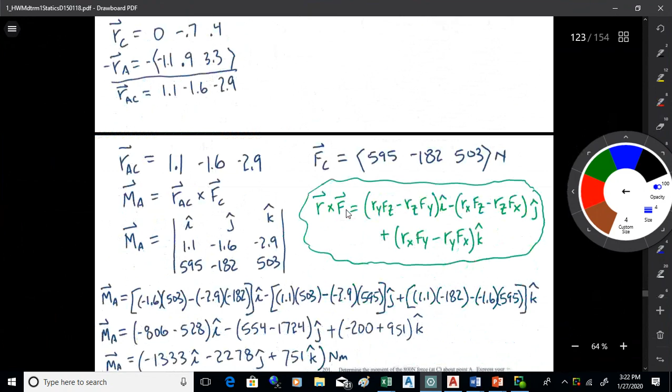All right, now we do have our first midterm coming up on Wednesday of next week. Okay, so we have that coming up. Let's have a look at a 3D review, because a lot of the stuff we're going to deal with on that midterm will be 3D, and we're kind of finished up a unit. We're not going to do too much more 3D.

So if you're online, it's 3D review problem from 2014 from the Moodle page downloads. Okay, it's available there. So let's have a look, and there it is. It's down in the homework downloads down there a ways. I think so. You should be able to find it there. Looks like this. So let's have a look. So find some other students that you can work with if you'd like.

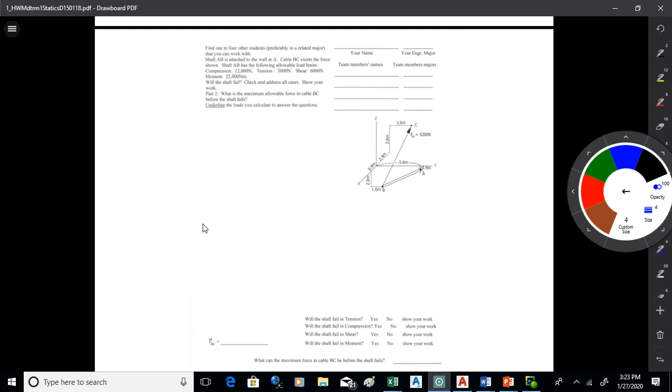We've got this shaft, and it's attached to the wall at A. And what we'd like to do would be to see if it's strong enough to take this force we're going to apply. So we're going to apply a force of 5,200 newtons to the shaft. Okay, now what we know about this shaft is it has allowable limits on it. It can handle 12,000 newtons of compression, 3,000 of tension, 6,000 of shear, and 22,000 newton meters of moment.

So that's like the specs on it, the specifications, what it can do. Now keep in mind that when a manufacturer makes something like this, they don't have any idea what you're going to do with it. So they will just give you the strengths that they think the object has, okay? So this is what it can withstand, but they have no idea what you're gonna do with it. So they just tell you everything it can do. And these are the common things that they would rate it for, okay? So tension, compression, shear, and we also have a moment criteria on this.

What I'd like to know is, is this shaft strong enough to handle that 5,200 newtons that's acting on it, okay? And what I would also like to know is what's the maximum allowable force in cable BC before the shaft fails? Okay, so how high of a force can you have in BC before the shaft fails?

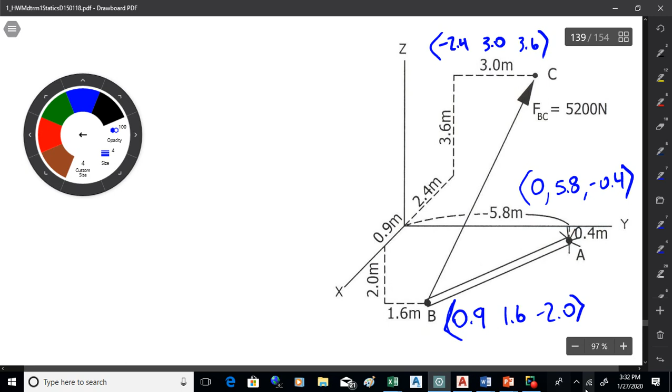Okay, there's the force vector. So now remember, you can have a little bit of difference from me. It isn't like my answer is perfect. If you're within 1% of my answer, you're good, right? So negative 2581, 1095, and 4380. That's what I got for that force vector. We good with that? In the ballpark, right? Any questions on that?

Okay. All right, the next thing to do, let's go ahead and find the axial force in that shaft. So see if you can find the axial force in the shaft. Remember, the axial force can be tension or compression. It's one or the other. I gave you both strength numbers because a manufacturer doesn't know what you're going to do with that shaft. They're going to tell you everything they know about it. So what you have listed on the top of that page is every possible thing to know about that shaft.

It's up to you to figure out whether you got tension or compression. Okay? And you'll have one or the other. You won't have both. It'll be one or the other that you will have. Okay? We good with that? So let's find the axial force in the shaft. It's either tension or compression.

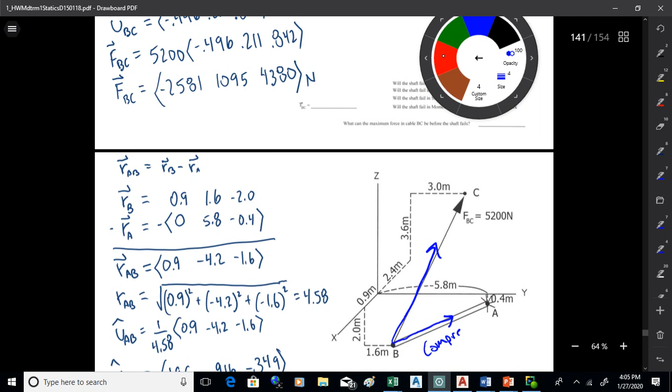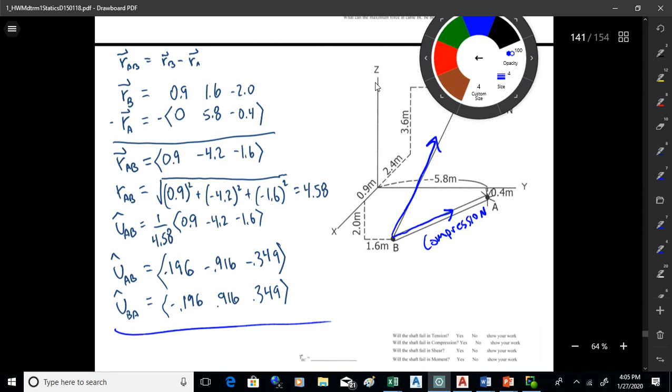So when I saw that, I said, okay, I will use the vector that goes from B to A. So I use this unit vector. Okay? Because I could see that component of the force goes from B towards A. And when I did that, sure enough, I got a positive answer. Now, had you used the unit vector that went from A to B, it would not have been a problem. You would have got a negative answer. And think of the negative as saying, no, it doesn't go from A to B, it goes from B to A. I just thought that's what it was supposed to do when it was compression.

Oh. So it's in like... Yeah, okay. There's different sign conventions. Negative is often used to signify compression, but in this case, the negative just means it doesn't go from A to B, it goes from B to A. So if I did this on the test, like if I left it as negative, would you mark... No, I don't get too excited about that, but I might have a little thing for you to circle. Is it tension or is it compression? Okay, yeah. And that's what I would pay attention to. The nuances of how you write the numbers down isn't a big deal. But whether it's tension or compression, that's a big deal. Okay.

Are you okay with that? In this problem, there isn't really tension. Right. See, a shaft is in one or the other. It's not going to be in both. It's either being compressed or in tension. It's one or the other. So you just have to analyze compression on this one.

Okay, and that's kind of what I was saying earlier, that the manufacturer will tell you what the shaft will do because they don't know what you're going to do with it. So they gave you all the specs on it. Okay? Is that good? Mm-hmm. Questions there? Okay.

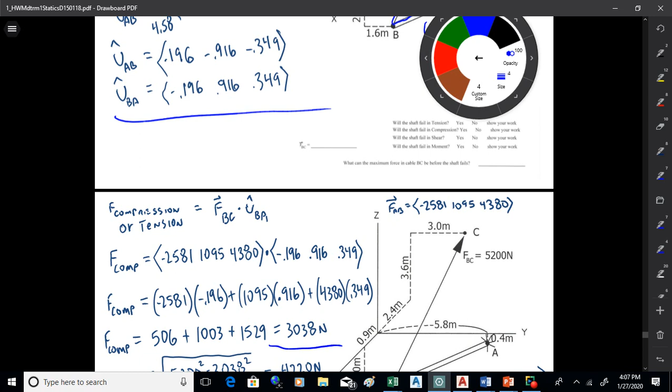Okay. The next thing there is to find the shear then, if you've gotten that far. If you've got questions, don't just kind of walk around, just ask me. But, all right, so the next thing is to figure out the shear. Let's pause the recording again here.

Okay, the moment would be next. Okay, so the moment is found using that cross right there. And you want to get your R vector and cross it with your F. And then once you've got that, you want to find the magnitude. So you'll get to the moment, okay?

My number is still off. I'm just gonna rewrite it. Yeah. I just did something else. Once you make one mistake, fixing it, it's almost easier to start over again, you know? You don't see the mistakes once you make them once.

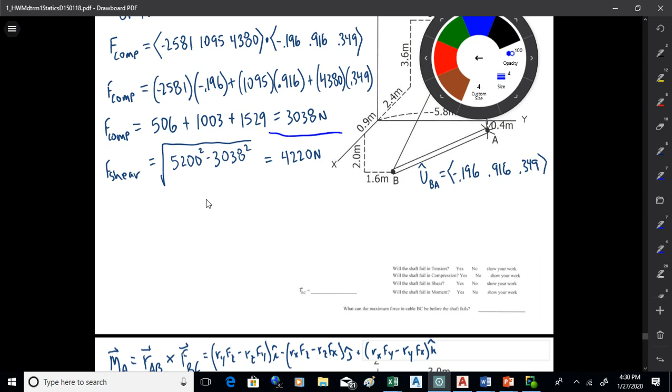All right, so the moment, there's the final number there. When you do the Pythagorean theorem, you get 19,343, something like that on the moment. Now the last little question there is, how high can the force in the cable go? And, well, you see, I do these side jobs, and when I can't figure them out, I just bring them into class and have you guys figure them out. So I'll let you guys figure that one out.

So now what do you do? I think you're always kind of used to teachers helping you out. What if I don't help you out? What are you going to do? Go to the tutoring center and ask a tutor. Yeah, well, that's one way to do it. There's probably a couple good ones that could help you there. In general, start working with each other, right? If one group gets an answer and someone else gets the same answer, that's pretty good. Especially if you use different methods and get to the same answer, that's a pretty good sign. Maybe on Wednesday, I'll take questions on it.

I guess the advice I give you on the last part is an ounce of common sense is worth a pound of calculations, as they say, okay? So just think about it. This stuff isn't like relativity. It's got a certain logic to it. There's a certain proportionality to how the numbers work. Don't overcomplicate it. You got to figure out which case governs, so to speak.

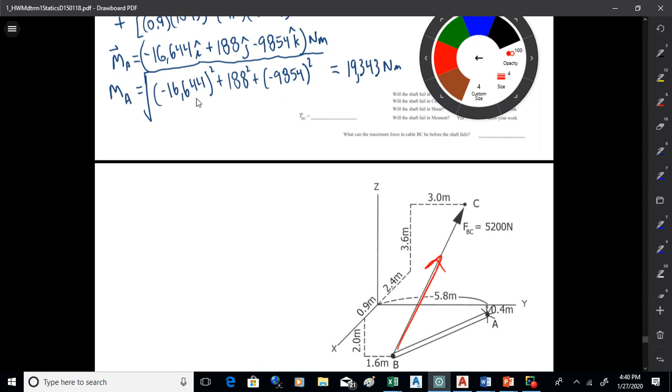So let's have a look here. Let's look at this review. All right, so what I have here, now this is available in Moodle. It's under the test review downloads if you're online. Okay, so let's just take a look at this.

First thing I have is the vocabulary. You should know what those words mean. Okay, so that's new vocabulary. You should know important things here, the difference between a vector and a scalar. Vector is a Cartesian vector with x, y, and z components. A scalar is a magnitude. Magnitude and scalar are kind of the same thing.

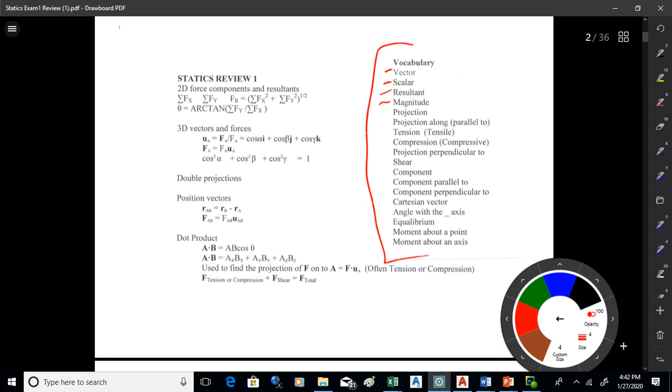Resultant is when you add two vectors together. Projection, you should know projection along, which could be a tension, compression, component parallel to. All these things mean essentially are related terms, okay, that I'm putting stars next to.

And compression. So tension and compression are axial forces. They're projections parallel to or components parallel to. Shear is perpendicular to. Okay, so a shear is a little different, right? That's a component perpendicular to. Cartesian vector, you should know, angle with the blank axis. So you should know the vocabulary.

If I ask you what's the angle with the y-axis, that isn't on your formula sheet, but beta is on your formula sheet. So you should know that beta is the angle with the y-axis. Okay, moment about a point, moment about an axis. Those are things you should know the meaning of. Okay, so those words there on the right, you should know.

So let's kind of look at what we did. We did 2D force components. Remember, we did that graphical problem, then we used trig and did some stuff with angles and added them up to get a resultant. But most of the stuff we've been doing here so far is 3D.

So we've got unit vectors by taking a force vector and dividing it by its own magnitude. That gets you cosine alpha i, cosine beta j, cosine gamma k. Remember, if you add up the squares of those three things, that equals 1.

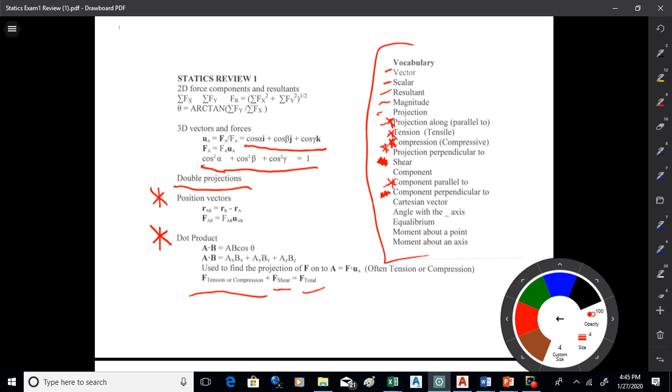Okay, we did 2D particle equilibrium. Remember that? I haven't turned that back to you yet, but you turned that in, those rings that were in equilibrium in 2D. Then we did 3D particle equilibrium, which is a little bit more of a formal process, where you put the forces in columns, you then add up the rows and set them equal to 0. We did 2D moments and then 3D moments.

So you did a 3D moment today. I'm sure I'll give you a 3D moment on this test. I mean, it's not a mystery or anything. It's an important part of doing 3D stuff, so I'm sure you'll do that, okay?

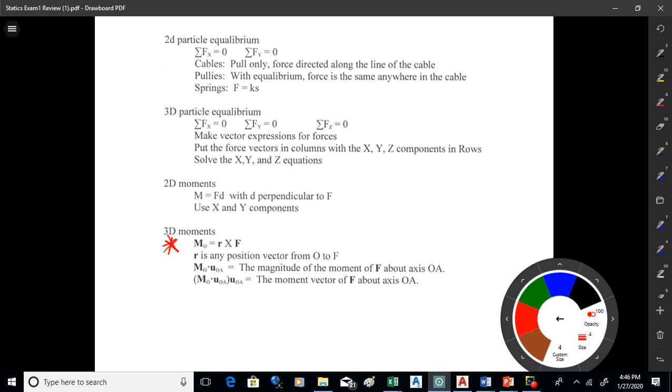There's the vocabulary. The stuff I put stars next to are the things you definitely want to know how to do. And the way you know how to do them is you do some on your own. You don't just follow along what I'm doing. You do some of these on your own to study and make sure you can do them, okay?

You look at the formula sheet and see how that's formatted so you know what things look like. You get yourself a non-programmable calculator and practice with it so you're comfortable with it.

I've seen this before, and don't get in this situation where I'll bring a box of calculators, but you don't want to be learning how to use a calculator while you're taking a midterm. You don't want to do that, okay? You want to have your TI-30 or your TI-36 or something like that, a simple calculator that's non-programmable. That's kind of the requirement at OSU, so I do that too. But practice with it before the test, not during, okay?

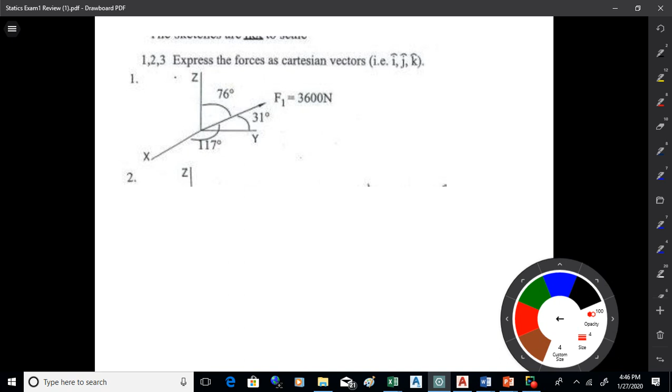Okay, here's some of the problems I just handed out. That one, can you do that one? You just take the cosine of the angles, right? You can do that. How about that one? What's that? Double projection, right? Two angles. So we'll go through these maybe on Monday, okay?

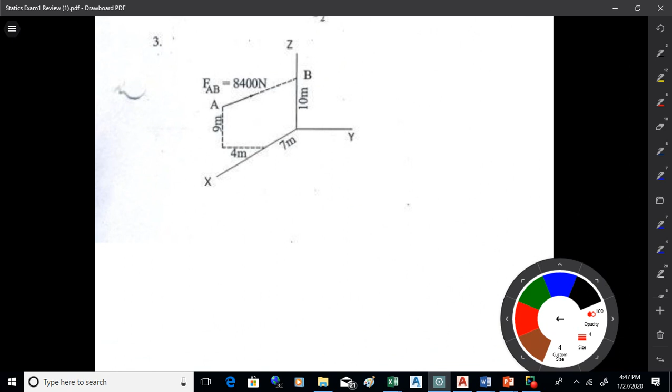So we'll do that. What's that there? That's a force vector, right? With position vectors, you're going to have to read coordinates and get the force vector. Here's a couple, just find position vectors and unit vectors. So again, you got to read the coordinates. You're going to show your work on those if you have to do anything like that.

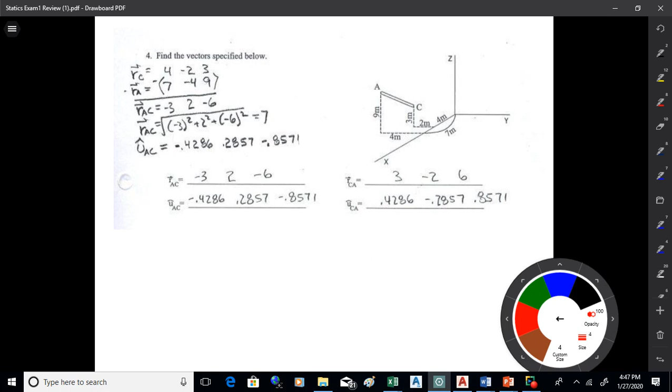So when you're taking this test, you're doing the work, but you're also giving me work I can follow so I can grade it, because you're going to take precautions so that if you drop a negative, I can see what happened, okay? That's your responsibility, right?

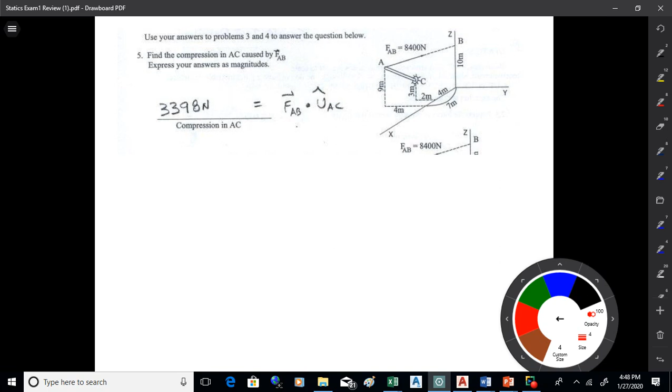Question? So from what we were discussing earlier, when you're trying to find the unit vector of — I think it was AC — do you always want us to find, like, if it's a beam A to C? I don't really care about the order for a dot product. The only repercussion of switching the letters is you'll get a negative sign. It's not that significant, really. So you could do it either way. Usually I start where the force is and go the other way. So the point of the force vector is where you usually start at? Yeah, normally, yes.

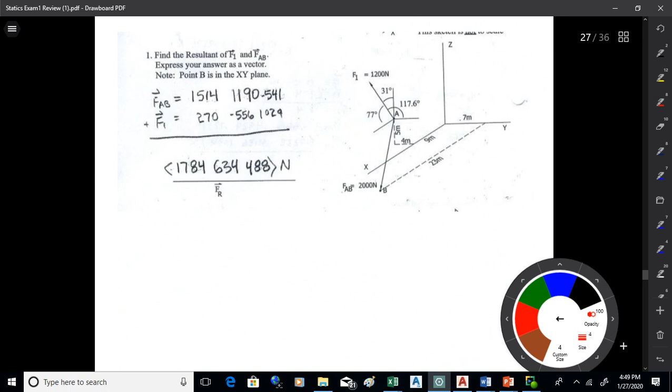Okay, there's a moment vector, which is a cross product. What's that? We've got a resultant, so you add the two vectors together. So you need to find the vectors — one's with angles, the other is with positions. Notice, even though I'm not at the origin there, I can still use the angles with the x, y, and z axes.

What else? Okay, there's a 2D equilibrium problem. So for sure you can do position vectors, find a force, do dot products, and do crosses. For sure you want to be able to do that stuff. Don't study anything until you get that figured out. That's the most important core stuff right there, okay?